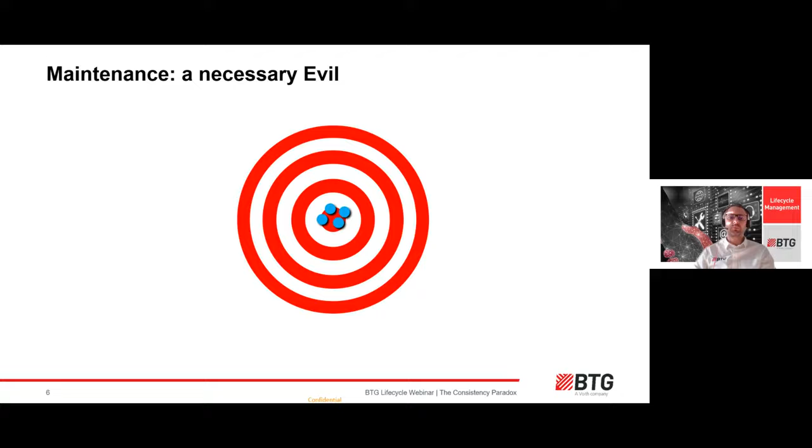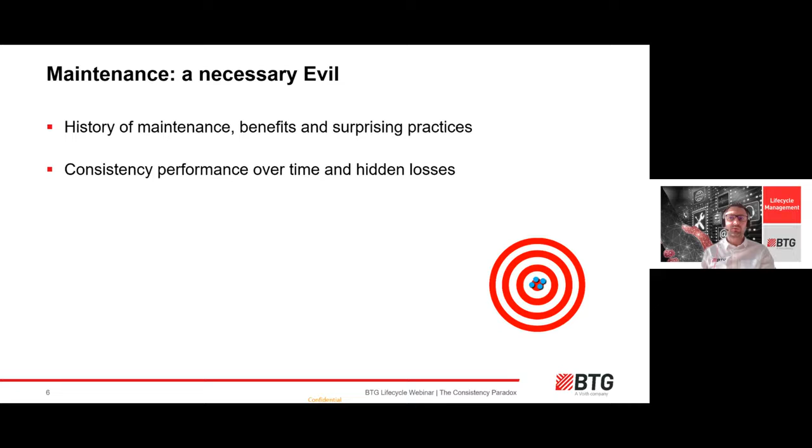And this webinar will take us over 3 parts. The first part will be about the history of maintenance, the practical benefits of maintenance, and we'll also be looking at some specific surprising practices in the pulp and paper industry. We'll see in the second part, by Suresh, how consistency performance drops over time and what the related hidden losses are. And the third part, from Matt, will be about the solution range from BTG, how to put consistency under control in a sustainable way.

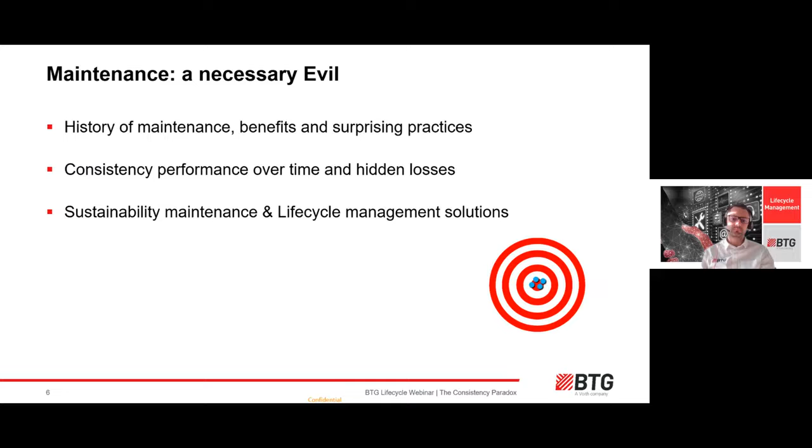And the initial reason why we created this webinar is that we see more and more a gap between the ambition and the efforts. There is massive investment in digital solutions, in newer technology, in software, in autonomous machines, there are big sustainability and energy savings projects. And at the same time, there is a progressive disinvestment in the pulp and paper fundamentals, such as process control instrumentation and its maintenance. And these fundamentals are not under control anymore, and this puts the whole process at risk.

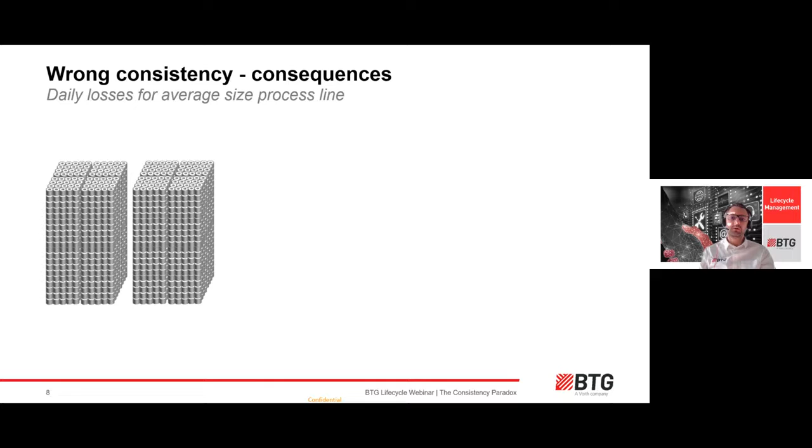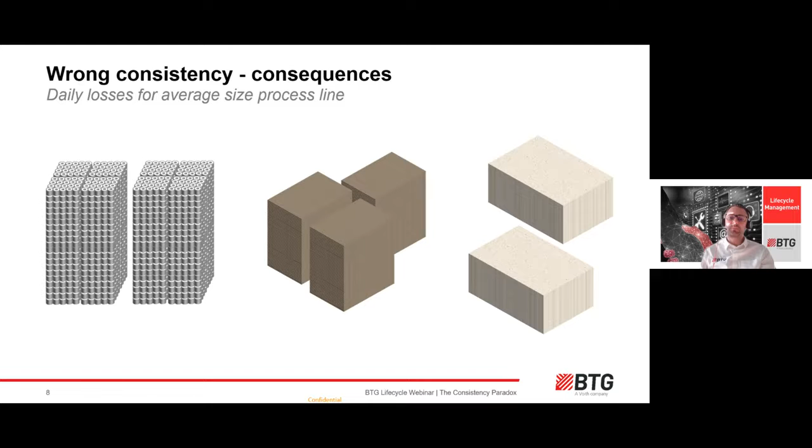And the risk is taking the shape of a massive financial loss. And we've estimated that on average, daily per machine, the wrong consistency can lead to the loss of 2 pallets of premium toilet paper, or an equivalent of 3 pallets of corrugated carton board, or 2 softwood pulp bales. And this represents respectively 120,000 euros per year for tissue, 250,000 euros per year for board, and 400,000 euros per year for pulp.

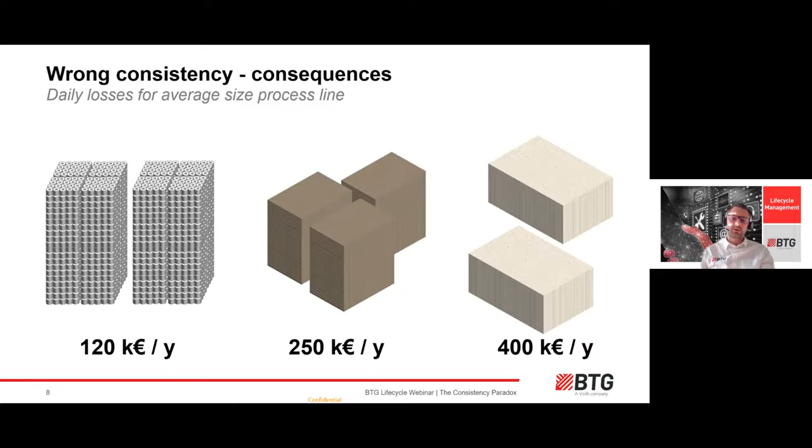And if we translate this into sustainability KPIs, the wrong consistency leads to an additional release of 1 ton of CO2 and an overconsumption of 50 cubic meters of water per ton of paper produced per day per process line. This is just gigantic.

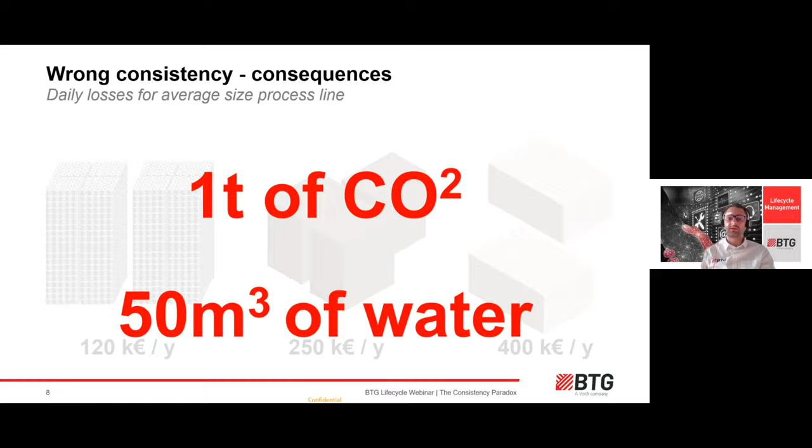And the major reason is that the maintenance of consistency instruments is often neglected. I'm quoting here an American professor of science and The Maintainers, which is a think tank in Washington, DC. As it stands today, maintenance is not prioritized or recognized. We have an obsession for innovation and we disregard the mundane. And the message here is that we tend to overlook maintenance, whereas it has contributed for decades to the development of the industry.

And in the early 20th century, maintenance started very actively with a practice which we call reactive maintenance: as soon as we get an issue on the machine, we fix it and we continue to run. But soon the development of the economy and the need for the industry to produce more and more pushed the equipment to their limits, resulting in frequent failure and downtime. And this pushed the industry to think of a different approach for maintaining their operation in a healthy way. And this is where we've seen the development of preventive maintenance.

And the principle of preventive maintenance is to have routine work on the instrument, on the equipment, before the failure occurs. And this practice of preventive maintenance boosted mostly during the Second World War. There was huge economic stress, there were limited resources, and the industry was forced to better take care of the installation and equipment. And routine maintenance developed a lot to keep the equipment in top operating order.

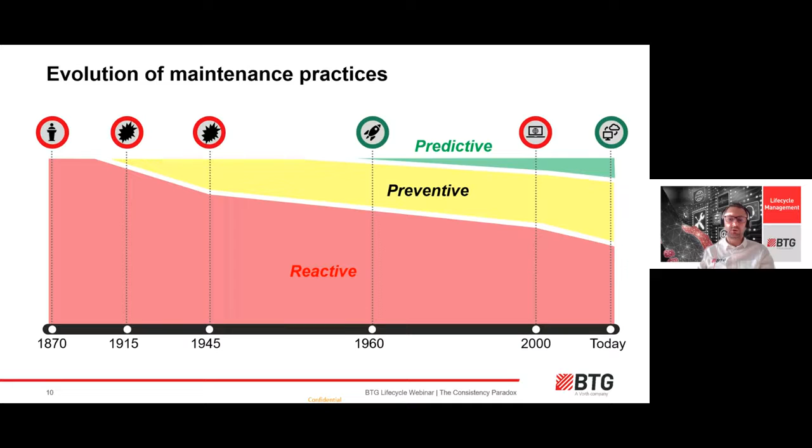And we can mention the example of the famous jeep. Because of the cost of the material, the difficult logistics at that time, and the time pressure as well, routine maintenance was a must-have. And you can see as an example the maintenance manual for this car, detailing all the checks that need to be done on a daily basis, on a weekly basis, on a monthly basis.

Later on in this story, in the 60s, as the mechanisms and machines became more complex, and there were also a lot of serious plane crash accidents, there was a need to think about another way of doing maintenance to avoid these big difficulties and fatal situations. And this is where predictive maintenance was deployed. So we were now taking more into consideration the operating condition of the machine or the element to better anticipate the issues.

So it was not only time-based or preventive maintenance to avoid the problem occurring. We were also looking at the working conditions to make sure that we predict when the issue would occur, and then we put the right action in place.

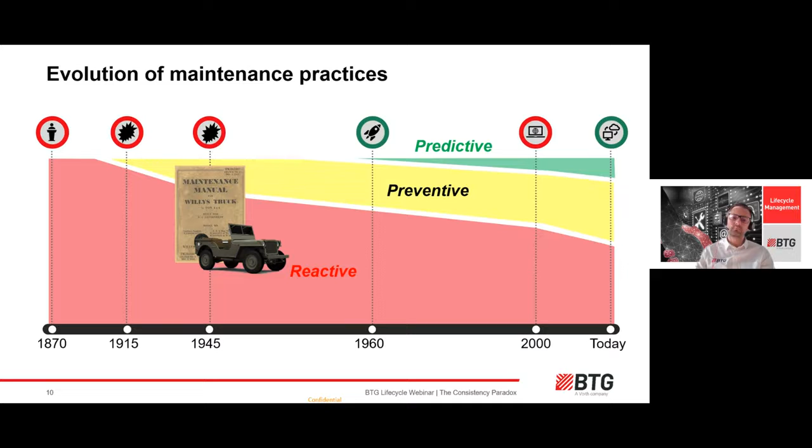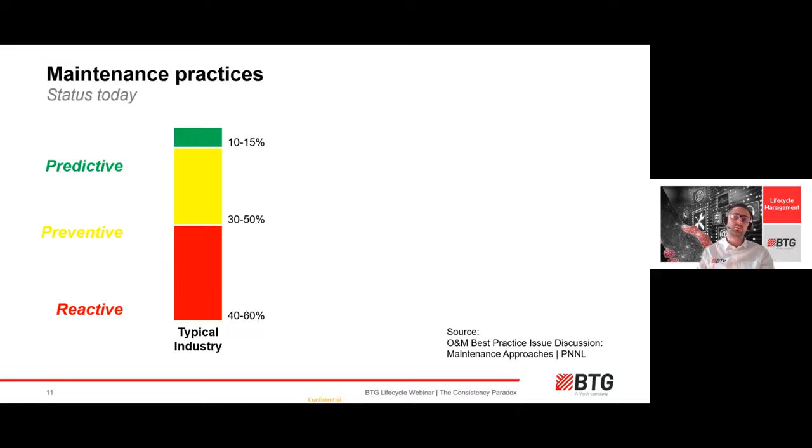And if we look today at the practice of maintenance, we typically have the following share in the industry: roughly 40 to 60% reactive, 30 to 50% preventive, and 10 to 15% predictive. If we compare that to what is best in class in the industry today, we see reactive maintenance at a much lower proportion because they are using much more preventive and predictive maintenance.

And the reason is very simple. Using more predictive and preventive maintenance helps to get much higher machine reliability and also quality. It improves the performance and reduces the downtime. And this gives an advantage in the market.

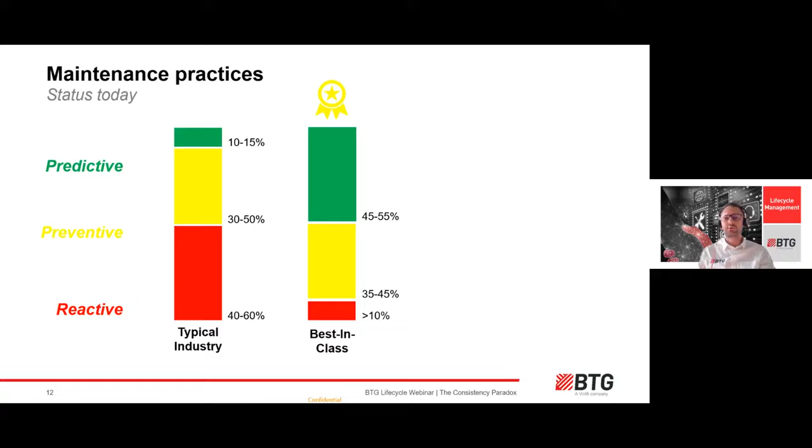And we can now make a parallel with the tissue industry, where we are comparing the low performers and the high performers. And the study shows that the higher performers have much more maintenance job planning and scheduling. And this correlates very much with higher reliability, meaning better quality and better machine availability. Naturally, more maintenance and more scheduled work involve more cost. But in fact, the maintenance cost per quality ton is lower, meaning a greater performance and also a higher quality of the paper.

And if you look on the internet and in other literature, there are a lot of studies reporting benefits of moving to preventive and predictive maintenance, because it helps improve performance by 10 to 15% or even higher, and decrease downtime and failure rate by 45%. And these are all great benefits.

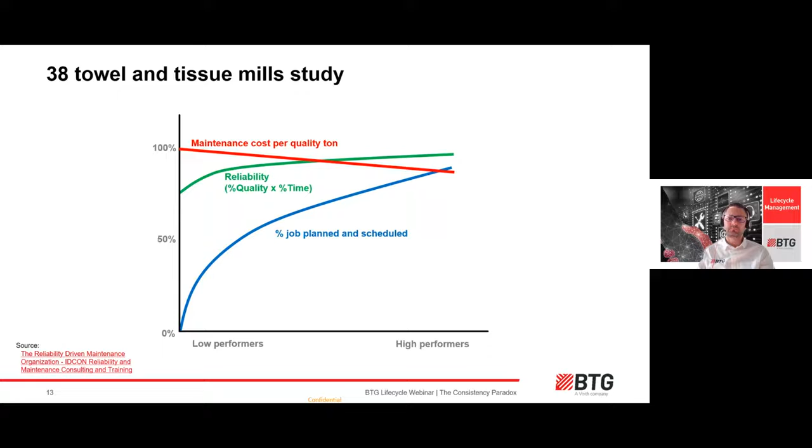Now, if we're comparing the best in class or the typical industry maintenance with what we see for process control instrumentation like consistency measurement, we see that reactive maintenance is still largely dominant. And if you remember the history of maintenance, this ratio we see for process control instrumentation, let's say 60-70 for reactive and 30-40 for preventive, is very similar to what we saw after the Second World War. So in summary, for consistency transmitters, we are 75 years late in maintenance practices compared to best in class.

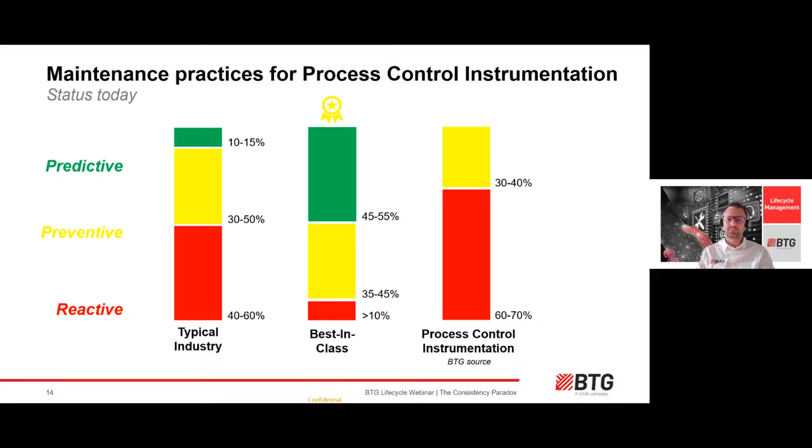And the question is why we underestimate maintenance for process control instrumentation. Our opinion is that there is a misunderstanding about process control instrumentation operation and its failure. I guess the normal thinking is that as soon as you get a measurement out of the sensor, it's working, it's good. But in fact, it's much more complex than that. And to give you more detail about this, I invite Suresh.

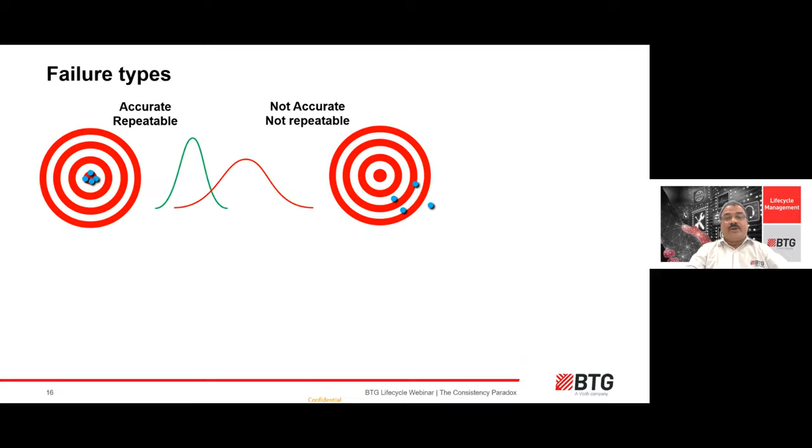On the flip side, if the measurement is inaccurate, it leads to unstable machine runnability, sheet breaks, induced downtime, off-spec paper, rejects and quality compensation, reduced process efficiency, and thereby productivity. When we usually hear failure, we visualize equipment falling apart, shutting down completely with no power anymore. But failure can be in different forms. It can be a mechanical failure, an electronic or electrical failure, or due to process or calibration disturbances. Let's see some mechanical failures first.

These instruments involve some moving parts and wear parts like sealings, drive belts, etc. When these parts get worn and contaminated, it leads to complete breakdown or measurement inaccuracy. Secondly, it can be an electronic or electrical failure, like overheating of hardware sensor cards making the measurements freeze, motor tripping, power and signal cable issues, etc. In some cases, due to process changes in the fiber mix ratio or grade adjustments, disturbance could happen. Also, after repair or overhaul of the consistency transmitter, proper calibration needs to be ensured.

Please remember all contact type sensors are shear force based and hence mechanically need to be stable. These types of failure we often do not consider, but they can have much higher impact on process performance than a mechanical failure, because the measurement inaccuracy and variability may exist for weeks or even months before being recognized, inducing variability to the process and hidden losses. As per a survey conducted by a popular industry magazine, the majority of unplanned downtime and emergency maintenance from equipment failures comes from aging equipment, lack of maintenance, and operator error. The first one is the major one.

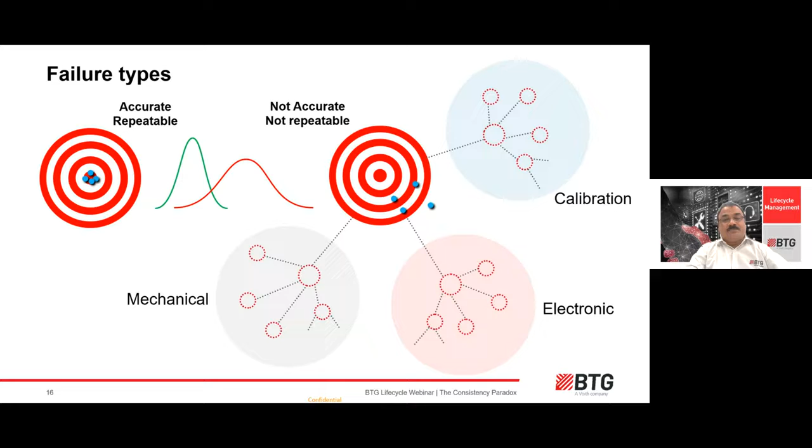Next slide, please. And if we further drill down, when a sensor is not adding value to the process, the operator decides to switch from auto to manual, permanently disabling the measurement usage. All processes, instruments, and machine elements are subject to failure and follow a very similar pattern. After being started up properly, with time and the given process conditions, a natural change in performance will happen due to aging, wear, etc. Equipment wears out naturally and its performance shrinks progressively before it reaches its end-of-life failure point. And this is exactly what happens to a consistency transmitter.

In the beginning, the equipment is set up correctly, and the measurement is available, accurate and precise. But lack of attention because of no or low sealing water, scaling, contamination and wear will change its performance, causing a big impact on fiber consumption, chemical addition, process stability, and sometimes causing paper breaks, etc. This needs to be addressed with newly learned practice and competence, and most importantly, we need to understand the instrument health condition, which can then lead to a solution for maintaining the instrument the way it needs to be.

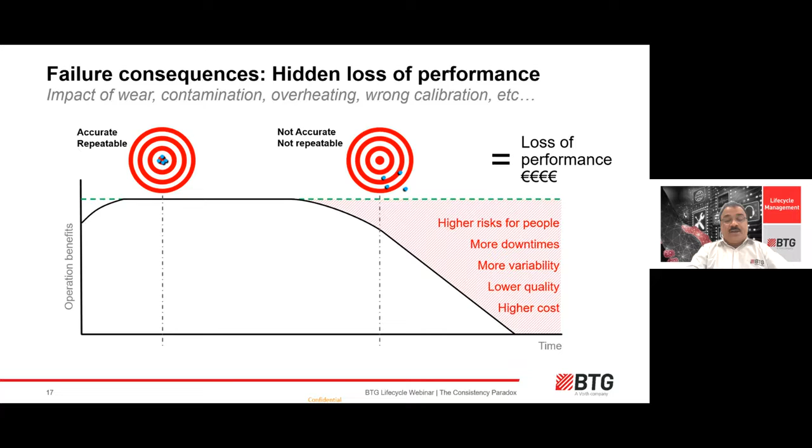Especially when these critical measurements are involved in regulatory and advanced process control, which perform the chemical flow control or the feed forward to the QCS basis weight valve control. In these cases, our objective is to optimize the process and reduce variability, which cannot be achieved in a consistent way if the field instruments are not accurate, maintained and updated in a timely manner.

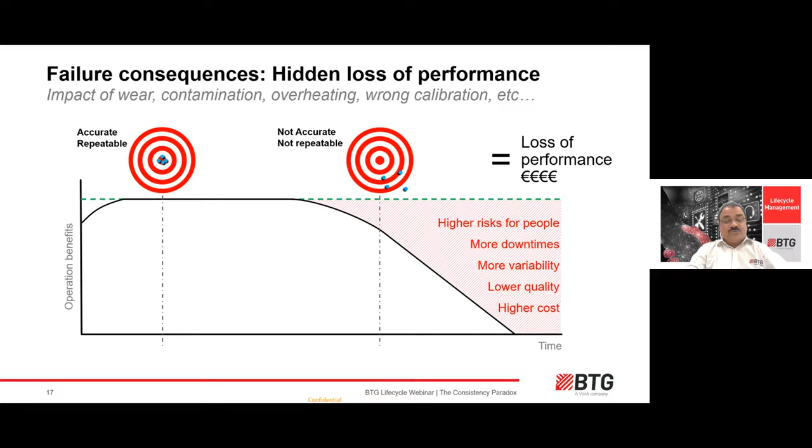The causes of poor performance of any equipment, as per a survey conducted by a popular industry magazine, are aging, which is the majority of the contribution, lack of training the second most, and lack of resources and lack of budget follow. Next slide, please.

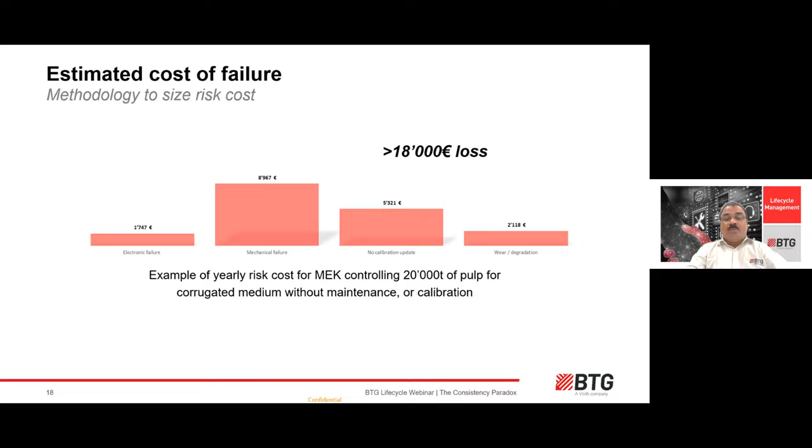We shall estimate the cost of failure by applying a known methodology for risk cost assessment based on our experienced service experts. In the case of a single consistency transmitter controlling 20,000 tons of pulp per year in a corrugated medium, no maintenance or calibration will lead to an estimated loss of up to 18,000 euro of risk per year if we do not care.

In this case study, we see based on the probability and consequence of failure in each category, the mechanical part is high. We could have prevented it with minimum preventive cost, and similarly the others, if we attend to them in time. Thanks to the reliability of instruments, some failures may not occur for years, but a single failure can lead to the stop of a complete pulp mill, incurring millions of euro in losses.

The methodology first involves the production cost risk, which is the effect of the probability of failure coupled with the likelihood of consequences and the cost of consequences. Let's see the probability of failure here. For each instrument, different failure types have been identified. For each of them, we define the risk and failure occurrence. Likelihood of consequences is whether a certain type of process consequence will happen once a failure type occurs.

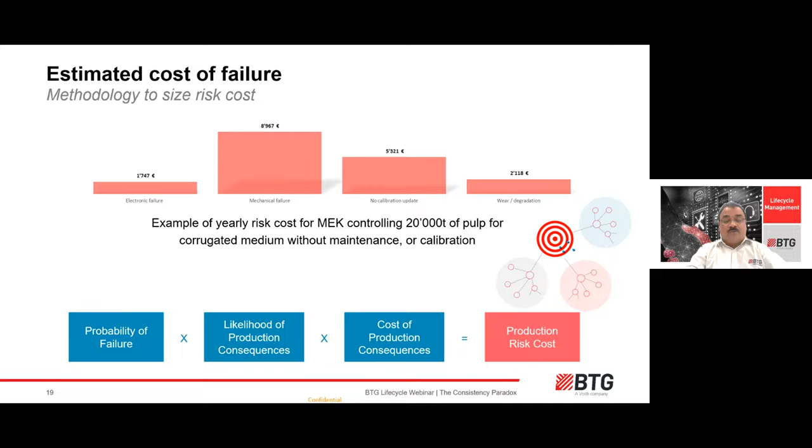For instance, here sealing wear might induce a complete mechanical failure after 6 to 7 years, with consistency accuracy already starting to get disturbed in 3 to 4 years' time. So the cost of consequences is the evaluation of cost based on the type of process we're dealing with. Very similarly, this economics can be estimated for every mill to assess the impact due to the failure of critical measurements. Next slide, please.

Now, if we see the impact across the unit operation, say in an OCC stock preparation, where there are several dilution stages, we shall estimate the total losses from different stages of dilution, considering how critical each stage is for process performance. For sure, the sensor after the pulper has less impact on the process than the machine chest sensor.

With our audit program FiberMax, we shall assess the condition of all consistency loops, and benchmarking shall be done to further evaluate the performance improvement. My colleague Matt will talk about this later today.

Based on our audit experience, only 40% of the control loops are healthy and the remaining 60% of the loops need attention. This calls for the reliability solution with this lifecycle management program, and we support our customers with our subject matter expertise to increase the performance and shelf life of the installed transmitters by identifying the root cause of the performance issues. Next slide, please.

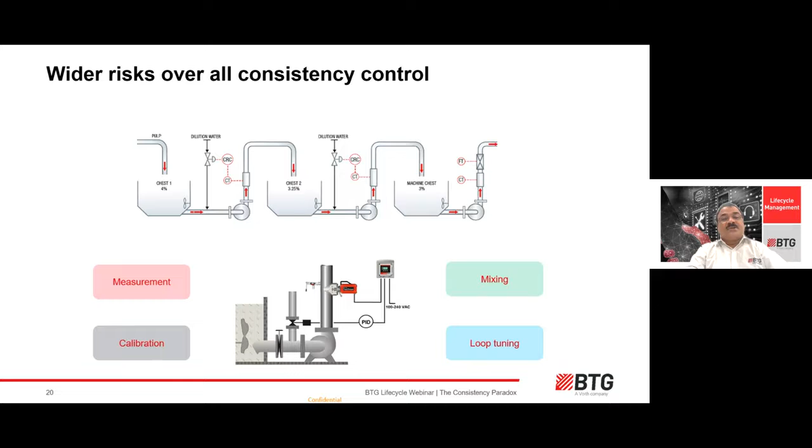We experience autonomous machines in our digitization era. Advanced process control is already successfully implemented in pulping and paper manufacturing processes, and we have solution programs like efficiency in pulping, real-time solution for tissue, and efficiency in paper machine, which deliver enormous value to our customers. And these programs are scaled out to various unit operations to optimize the process in real time.

The technique consists of collecting multiple variables which influence the key parameters to improve, optimize, and control the root parameter to ensure the key parameter is always on top. But if one of the root parameters, like consistency measurement, is constantly out of control with big problems of accuracy and precision because of failures, regulatory and advanced controls will never deliver maximum performance and will never be reliable.

And we see now more and more digital teams deploying APC solutions in their process, coming back to fix the consistency control first, as they realize this is the mandatory step to success. But it is also the best practice to ensure and follow a schedule to monitor the signal from the consistency transmitter, whether it is accurate and precise to deliver the performance as it was started up.

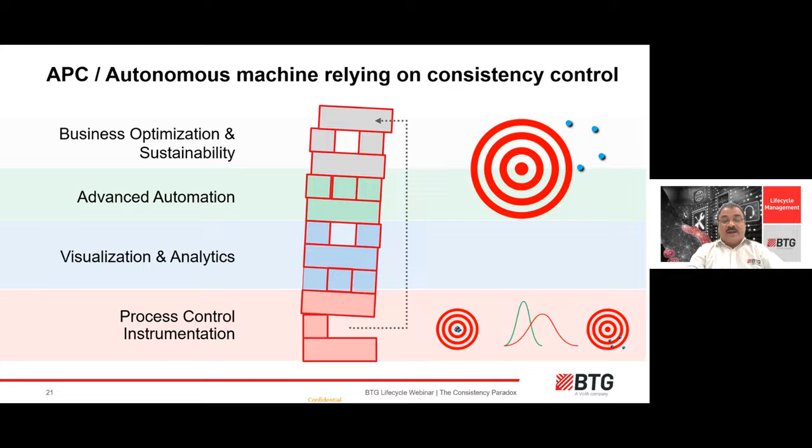We have seen today maintenance practices corresponding to what we used in the 50s, and it's resulting in massive hidden losses when the instrument fails for various reasons, as Suresh pointed out. With the advent of technical evolution and increased software capabilities such as AI, we are now going one step further with process control within the paper industry and seriously considering autonomous pulp and paper processes in the coming years. This is not fiction anymore.

But from a single control loop to the factory of the future, it is critical that the inputs being used for control purposes are accurate, repeatable, and reliable. Consistency measurement is one of the critical inputs throughout the pulp and paper industry. As my colleague Suresh pointed out earlier, the cost of failure is quite high. Proper maintenance and planning of instruments, especially consistency transmitters, are the key to accurate, reliable, and repeatable inputs for all levels of process control.

In addition, there's also an increased emphasis placed on sustainability and environmental protection throughout the pulp and paper industry in recent years. Customers are demanding that we be good stewards of the environment through their purchases. Customers are not just looking at the price of a product, but they're also looking at things like recycled content to make their buying decisions.

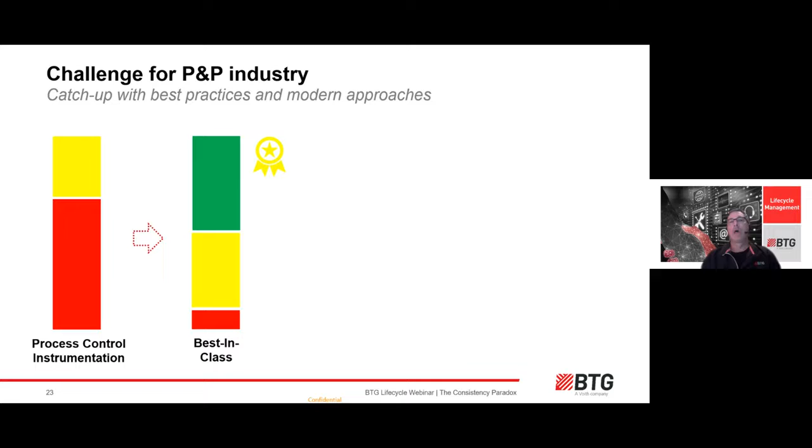For consistency measurements, that first step is to know where you're at, know the status of your sensors, understanding the loops and their performance. During the journey, or at least the start, there are many challenges that we have to overcome. For consistency measurements, it's always the same questions: how can I be best in class with older instrumentation? Or, I do not have the money to buy new transmitters. One thing to consider is what are the advantages and disadvantages of a new transmitter that is not well maintained versus an older, well-maintained unit.

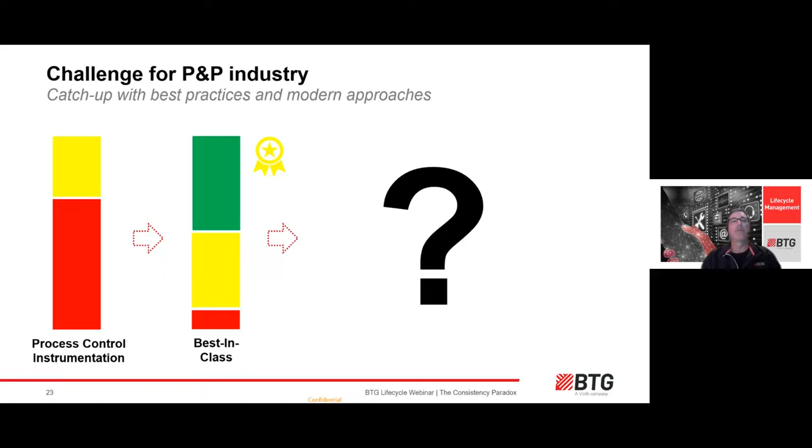Let's take a look at a hot topic in terms of environmental stewardship, electric vehicles. Sometimes a solution seems counterintuitive. Electric vehicles have become the poster child for saving the environment and are growing in popularity. However, some research shows that simply keeping our old car and maintaining it longer has less of an impact on the environment than transitioning to an electric vehicle. There are literally hundreds of articles on the environmental impact of gas versus electric powered vehicles. The more reputable sources say that overall, electric vehicles are better for the environment, but it's not as cut and dry as you think.

If you use carbon emissions as the standard, it takes between 4 to 7 years for electric vehicle ownership to become carbon neutral over a well-maintained, highly efficient gas-powered vehicle in North America. What you need to consider in determining how soon you get to carbon neutral is the carbon emissions generated when the vehicle is manufactured, plus the carbon emissions generated with the battery. And in addition, in my area of North America, the Midwest, the cost of electricity to charge that electric vehicle is rather high, and it has a carbon footprint itself, because we use mainly fossil fuels.

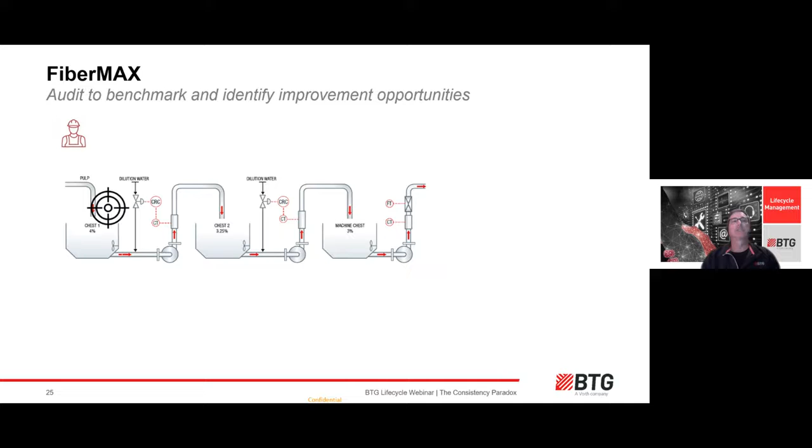So back to our journey. To take that first step is to know the status of your instruments, the loops, the tunes, the sample valves, etc., in what we at BTG call FiberMax. FiberMax is a holistic approach to consistency measurement in the papermaking process. Everything relies on fiber mass flow. Pulp mix, refining, chemical addition, basis weight, all rely on stable, accurate, repeatable consistency measurement. Each consistency control loop is part of a chain that is designed to take out variation before key unit operations.

Unfortunately, not all control loops are always healthy. As Suresh pointed out, when doing an audit, we find that roughly 30 to 40% of the control loops are not healthy. BTG's FiberMax review finds the weak links hidden in the chain and outlines the proper steps to bring these controls back to health. So what is FiberMax? FiberMax is an intense check of the entire unit operation, instrument installation, maintenance practices, the health. We perform bump tests along the way to check valve response for the dilution valves, set point and consistency variation, consistency reduction and control, dilution design and capabilities, and then control loop performance.

In addition, we look at a benchmarking study as well. We determine where you are in terms of what we consider best in class. We identify those gaps and the benefits to improving the situation. So the outcome of the FiberMax survey is we make proposed solutions and recommendations, estimate the benefits on those solutions and recommendations, and give you an idea what it takes in terms of investment to achieve those estimated benefits. Taking the next step in the journey, we begin working on the solutions and recommendations, and that typically starts with the weakest link.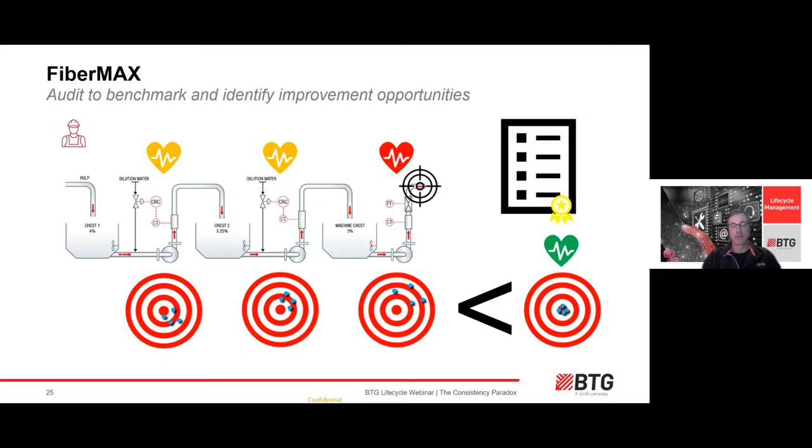Some of the tools that we use to look at that weakest link are CalCheck, which is a physical inspection of the transmitter itself to detect any type of anomaly. We check the calibration consistency in the lab and compare with the measurement itself. We also take a look at how you measure in the lab as well, seeing if you're properly measuring the consistency. And if calibration is required, we'll make recommendations in terms of that.

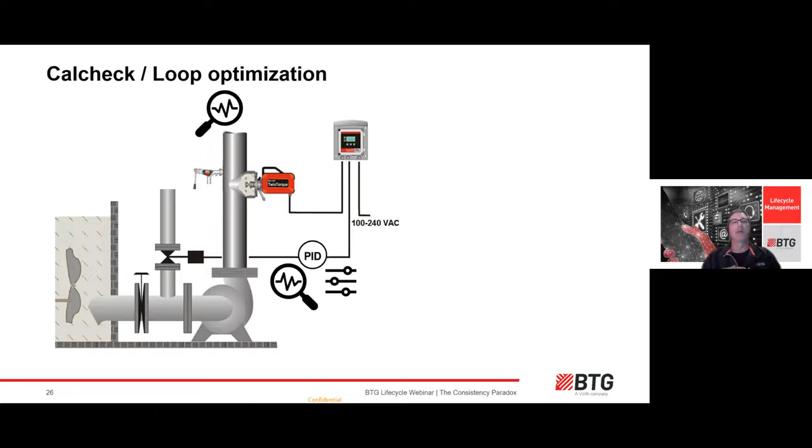In terms of loop optimization, that's checking the PID settings, the dilution valve reaction, and evaluating the impact on consistency variation and stabilization. So what we do is turn an inaccurate and unreliable consistency measurement into best in class. What is the next step in the journey to preventative maintenance?

In preventive plan, that is maintaining our gains. Specifically for consistency transmitters, how do we guarantee that the value of the output remains accurate and precise year after year? The solution: preventative maintenance, structured in a 5-class system at BTG.

Every good maintenance starts by periodic inspection and housekeeping made by the user every week or every month to ensure an early detection and avoid issues with the instrumentation. Simple but useful and highly effective. There's nothing like going out and doing a physical inspection while on site. On a regular basis,

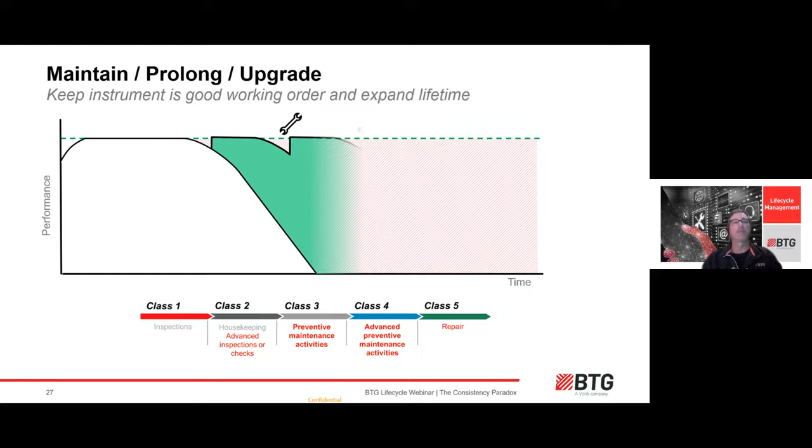calibration should be verified, eventually adjusted with an offset until a new calibration can be added. To avoid failure and repair, preventative actions from class 3 and 4 should be scheduled based on process situation experience to maintain instruments in measurement quality, thus avoiding the loss of performance that we have seen before. So next slide, please.

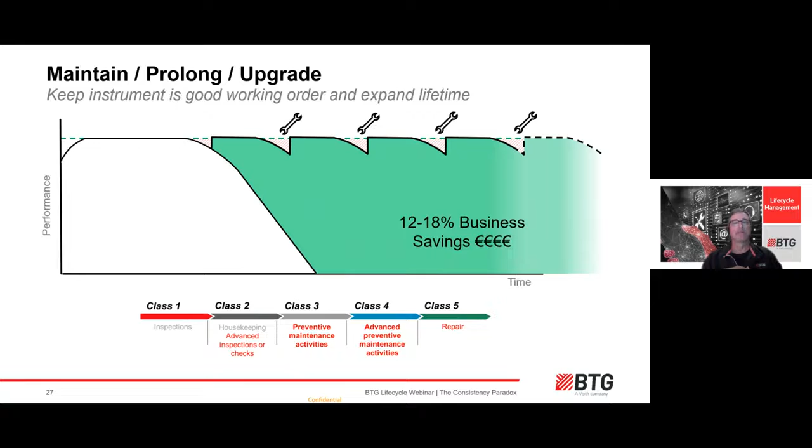Ensuring reliability of consistency control also means investing in the right instruments and considering the long-term benefits rather than just going with the lowest cost investment. We need to look at the total cost of ownership. So let's compare usage of disposable and cheap with high quality instruments.

Over its lifetime, the low cost option will lose accuracy and induce variability in the process, generating additional costs that are often hidden. After a few years, you might need to change it because it cannot be repaired anymore. A higher quality product will maintain accuracy longer, and a proper maintenance plan will help ensure that it is maintained at top performance.

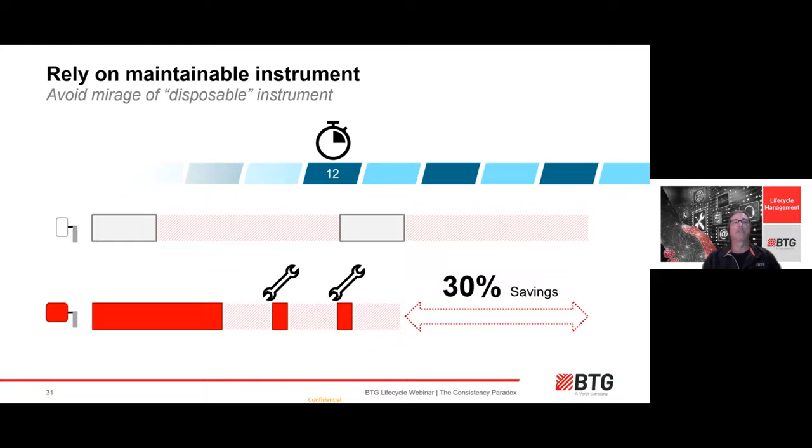And after a few years, there might be a need to change the disposable instrument because it cannot be repaired. Then after a few years, the story repeats. For a higher quality instrument, which was well kept and maintained, efficiency and performance remained at a good level, in total helping make significant savings. So the total cost of ownership is actually 30% less than what you have with the cheap disposable transmitter. We have plenty of examples like that around in our personal environment, in our cars and in construction.

For me personally, I'm a woodworker, and I have a compound miter saw. For years I had a cheap compound miter saw that I used. I bought the saw because it was on sale and I was brand loyal. I maintained that saw, but after many years of what I thought was reliable service, I finally had to replace it. It wore out. Then I treated myself to a more expensive, higher quality tool. And what a difference that made. It made a tremendous improvement in cut quality, minimizing waste and time savings.

What I didn't realize with that poor quality saw is that I was having to make fine tunes and adjustments, and some of the cuts were so off that I had to actually throw them out and restart again. So I was wasting material. With the new saw, I set it up, it runs, it makes accurate cuts, and it maintains its reliability over a period of time. And what I've learned can be applied into the pulp and paper industry.

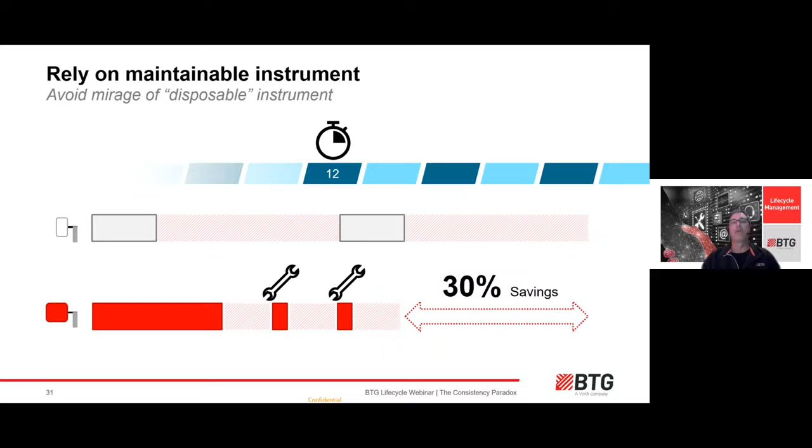Continuing on our journey, the next step is to take advantage of the evolving technology and move towards predictive maintenance. Performance of instruments highly depends on process conditions like pulp type, kappa, proper lubrication, etc. For example, an MEK running without any seal water for a few days results in premature wear of seals, which then creates leaks that may generate damages, and eventually it'll fail. We have issues with pipe vibration or overheating of electronics.

I do a lot of work in the southern part of the United States where the temperatures reach into the hundreds of degrees with high humidity, and a lot of the transmitters are outside exposed to the elements. To help prevent failure of these instruments, remote monitoring capabilities now exist. This checks that all internal operating parameters on the sensors are okay and that there are no premature issues. Just like Patrick Michel's smartwatch that monitors his vital signs and alerts him if he needs to stop and rest, recover or rehydrate during his run, we can also use that technology to monitor the health of our instruments.

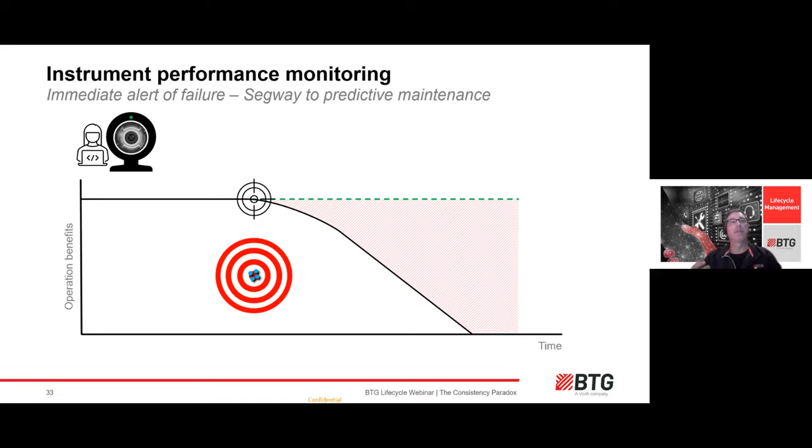The data is analyzed by a service engineer remotely, supported by the data management software, to identify the anomalies within there. Next slide. As I said, monthly follow-ups and checks of whether the instrument is working within the proper control limits. So when detection is triggered, when the alarm is triggered, an action can be coordinated with the customer. It might be a check or a maintenance check. This will anticipate fatal failure or a big deviation to minimize losses.

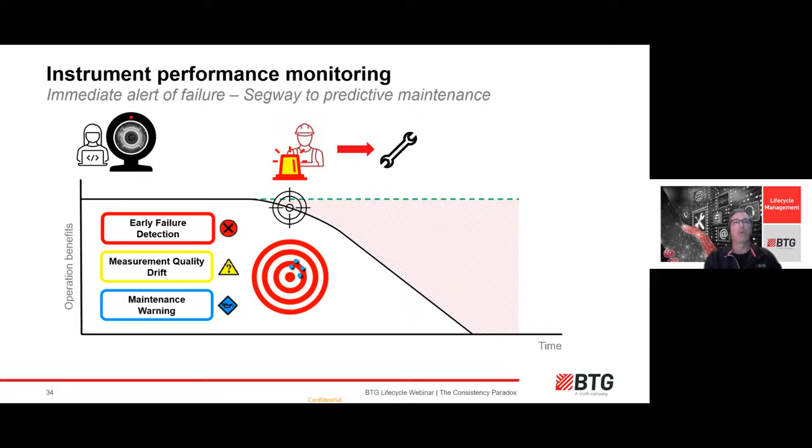Early failure detection, measurement quality drift, and maintenance warnings are some of the things that we have with remote monitoring capabilities. Now we're into our journey from reactive maintenance to best in class. To make the remaining journey go smoothly, we do not stray off our path, by sticking to our plan. For consistency measurements, it's a life cycle management program. The paramount solution in life cycle management is a long-term program combining maintenance services, performance service, instrument monitoring, and engineered scheduling.

Building a plan to define service visits to maximize the install base is consistency care, each instrument having a different maintenance routine. Several visits per year for instrument checks, maintenance, and calibration updates are required. Smart monitoring for all of the consistency transmitters will also help anticipate needed visits for maintenance. We may get a warning and we'll schedule a visit to come in to take a look at that warning to understand what is going on. Continuous care of the installation base.

One of the things that we call reliability assurance agreements is a consistency care program. The purpose of the RAA is to guarantee optimum performance of the instrument so that it's providing a reliable, repeatable signal for use and control purposes. And the benefits: we prevent costly surprises and unnecessary downtime. And expanding the long-term planning of the major maintenance operations is to go into upgrade and replacement.

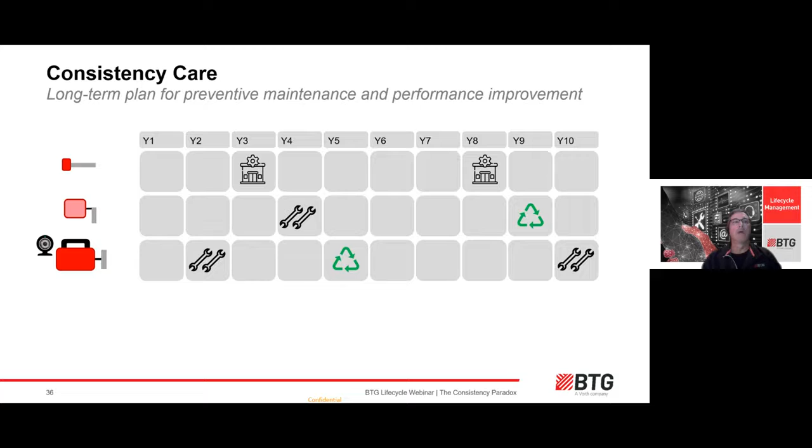Some instruments require complete overhauls every few years. This can be done at our service site or at the mill level. Some instruments, because of lack of key spare parts, or because there's too much damage or wear, have to be replaced. Planning major operations helps design a controlled budget for a long-term vision, so that you control your costs over a longer period of time, and you're not taking a major hit on the capital budget due to an unexpected failure. As with Michelle's journey around Iceland, our life cycle management journey is a marathon and not a sprint. We at BTG are here to help support you along your way. And now I turn it back over to Florent.

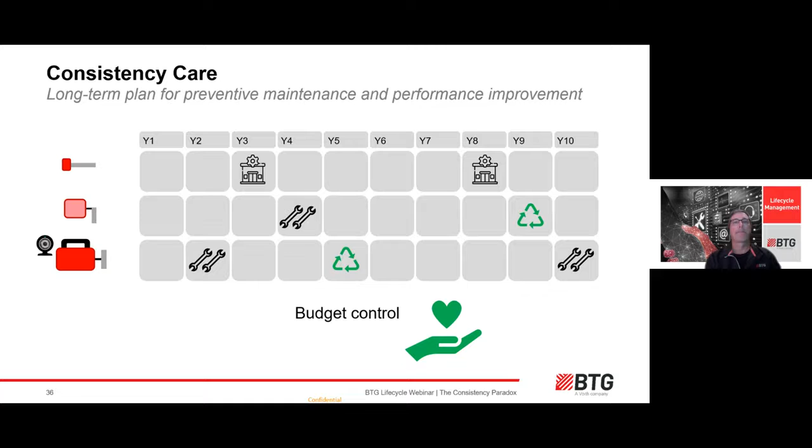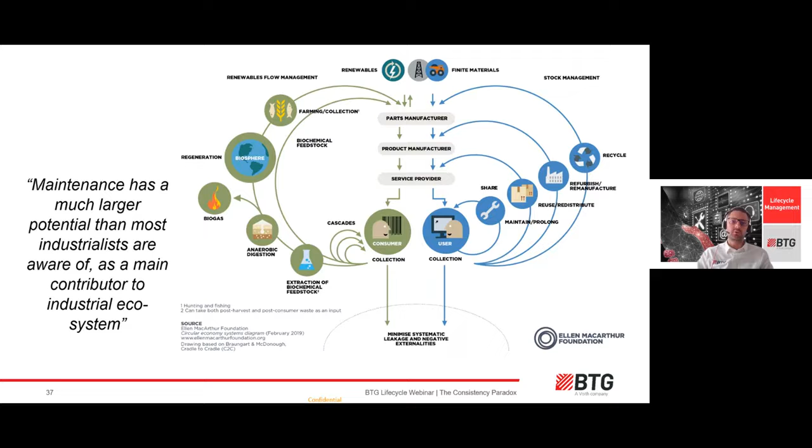Thank you, Matt. With all that was described before, the BTG Lifecycle mission is to provide solutions that contribute to pulp and paper process performance, help with cost reduction, process and quality stability, and also sustainability. The solutions we design are very much aligned with the principles described in the Ellen MacArthur butterfly diagram, which promotes the circular economy and sustainability. Maintenance has a much larger potential than most industrialists are aware of as a main contributor to the industrial ecosystem. The solutions we propose help maintain and prolong the life of the instruments so that they deliver constant, high quality measurement that can be used to reduce fiber consumption, make sure the machine is running smoothly, and so on.

And we have different strategies. We can collaborate very closely with the customer to perform the maintenance. We can provide spare parts. We can help make repairs at the service center. We can also do service on site, and sometimes the customer can do the service themselves. There are different stages and levels of service, as was explained before, with different classes of services, class 1, 2, 3. The customer has a role to play in this maintenance.

We also have various strategies to reuse, redistribute, or remanufacture parts. There are some online analyzers that stay at the customer site, where we take the old part of the analyzer and refurbish it at the service center, so that we also minimize the usage of new pieces. We are trying to minimize the stress on the environment, and this means less traveling and less time on site as well. So we are working on reducing our impact from unnecessary travel and unnecessary replacement with new parts. And naturally, this is a standard approach. Now we are recycling. We are taking back all instruments and recycling them in the proper way.

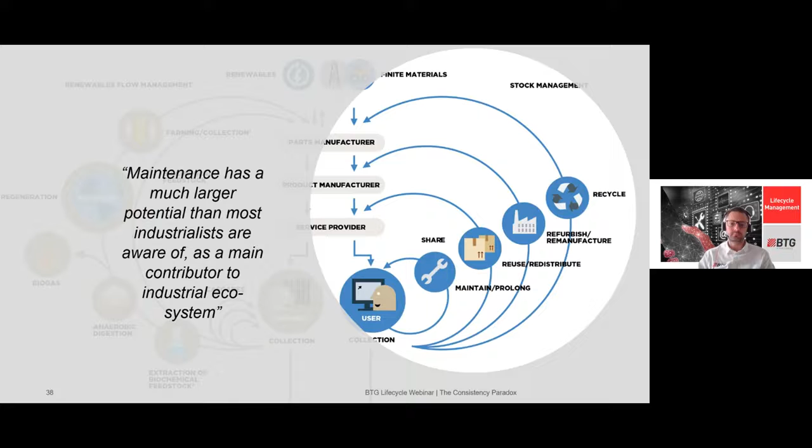So I'm sure that you've heard about the butterfly effect. It's when the small flap of the wings of the butterfly can create disasters a million kilometers away. And that's the same with consistency. A tiny failure or tiny deviation of the measurement can cause a severe impact on the process performance and sustainability.

And there might be different sources for that. We've seen all the sources along this webinar. They can be mechanical, they can be related to the electronics, and most of them are related to calibration drift, because the process changes, because the fiber mix changes, because the type of fiber changes, because the production capacity of the machine changes, and we should pay attention to make sure that this is under control. And we can put that in control with BTG Lifecycle Management Solutions.

And often we are building the solution with the customer. Not every customer needs the same things. Not every instrument needs the same routine of maintenance. Again, it depends very much on the process. It depends very much on the way the instruments are used and for which purpose. And this needs to be worked, designed, and adjusted with the customer process and expectations.

And the benefit of all of this is that naturally we are preventing the costly failure, we're reducing total cost of operation, we're improving the quantity and the quality of the good tons, and naturally also improving the safety of the people. And after all, we are contributing to the sustainability.